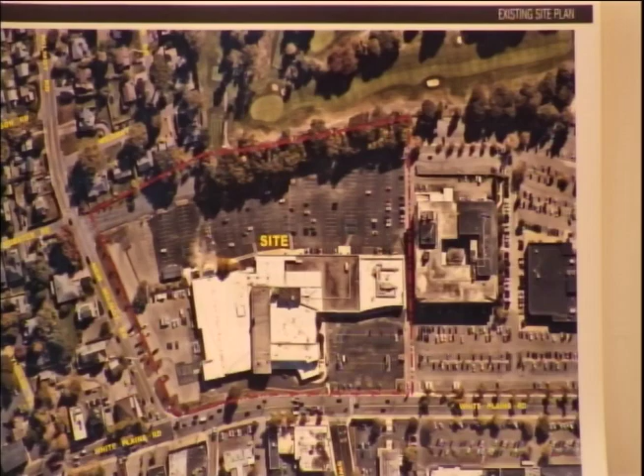So we'll start off. My name is Glenn Leitch, I'm one of the principals at Highland Associates, architect, engineer that's working on the project. This is Michaela Giacomazzi, who is the project manager, who will continue with the presentation.

Thank you for the introductions, Glenn. So as we'll start off, we have the overall site plan and the area that we plan to do our work in. And then we show different angles of the building, how it currently is today, including some of the improvements that White Plains Hospital has been doing.

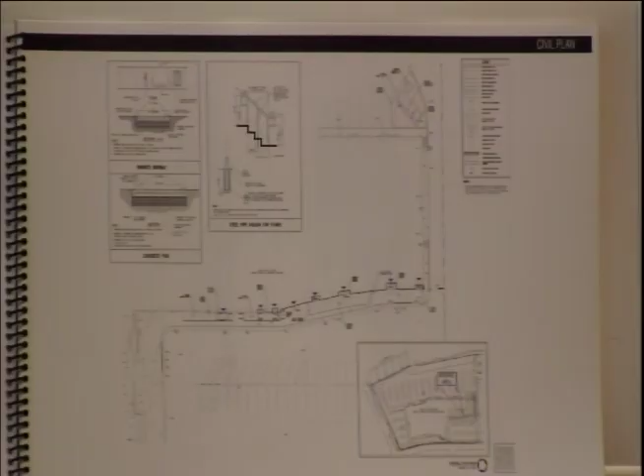And then we go into our civil plans that involve putting in a trash enclosure into the back of the building and some minor site grade curb work. Paul, do you want to speak a little more to that? Good evening, for the record, Paul Dumont with JMC.

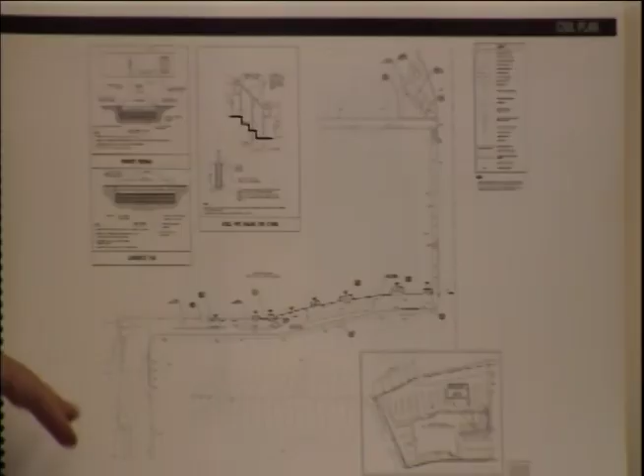Okay, good, so we can see that. So in order to accommodate subdividing the building for the various tenants, the slab on the east side of the building is going to be lowered to its original elevation. It was previously raised to accommodate Lord & Taylor. So on that side of the building, there are some existing steps that will be removed, so that entrance will be flush with the grade. And then on the west side of the plan, where the other tenants' entrances will be, we're proposing just some ramps and landings to accommodate their entrances there. So that really is, in terms of the site work and exterior changes, what we're proposing.

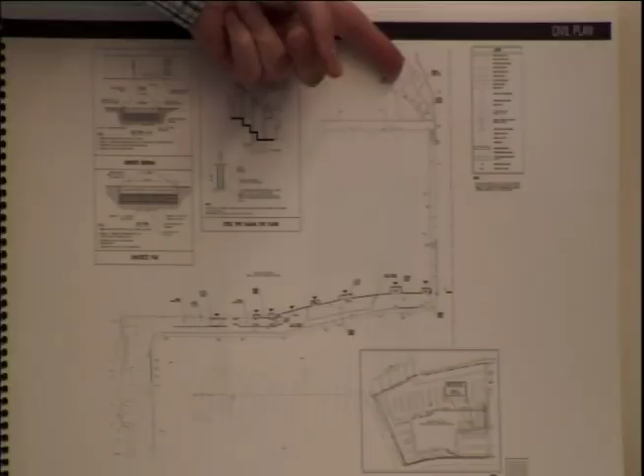And then in the rear of the property behind the building, we're proposing a trash enclosure with a compactor and a dumpster. Thank you, Paul.

So next, our plan just kind of shows the different tenants and how it's being subdivided into the space. We're going to have up to 5. And then also tenant number 5 is taking that first floor space.

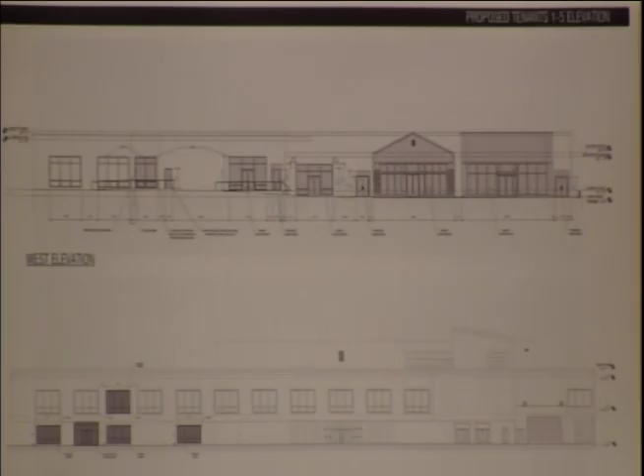Over here, we have our proposed renovations to the exterior facade. We have tenant 1 having some build out, tenant 2 also getting some faux paneling on the front, new openings to kind of match the existing openings that there are now. And then a new exit path for the second floor tenant that will be on this side of the space. The new openings will match the existing windows using the 15 foot modules.

And then on the back side of the building, where tenant 5 is going to be taking in, we are adding some new windows, modifying the entrance at that space, again maintaining the 15 foot modules to go along with the aesthetic for the rest of the building.

I just have one question based on the previous page. On the back, the east elevation, are the dark windows, the gray windows, where they're adding windows? Yes, that is correct.

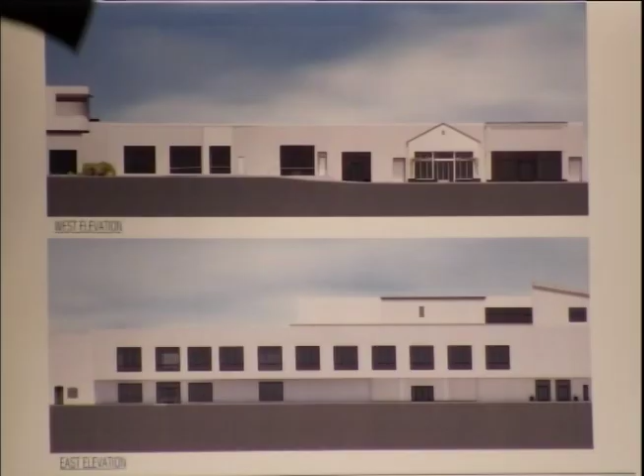We wanted to make sure you guys can notice the difference. These are just our proposed renderings of what some of the facade modifications will be. As noted, we're going to have a new ramp system for some of these areas that are at a higher grade, and we removed the grading from here as that floor slab is going to be leveled to match the old conditions.

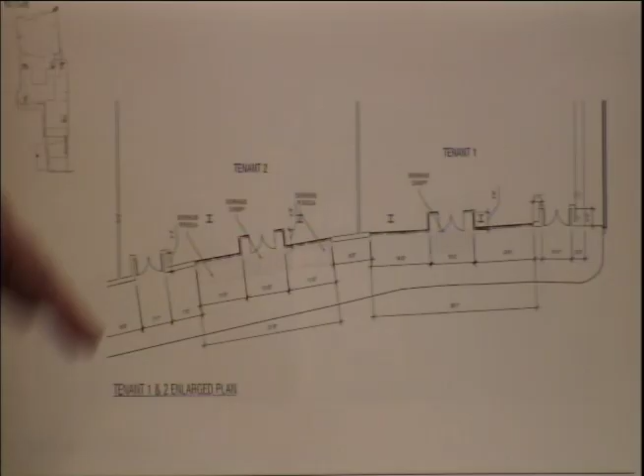And then on this page, these are showing the dimensions of where tenant 1 and tenant 2 are taking their space, the doors they're adding for egress purposes and entrances, along with the pergolas that would be added to the facade systems.

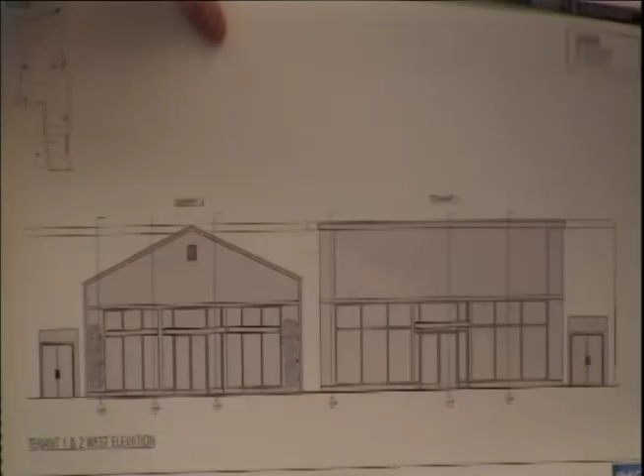And then we go into more detail with tenant 1 and 2, including their facade systems and what they anticipate or plan to do. We show some of the proposed details that show how it's going to integrate with the building facade that currently exists and attaches to said facade.

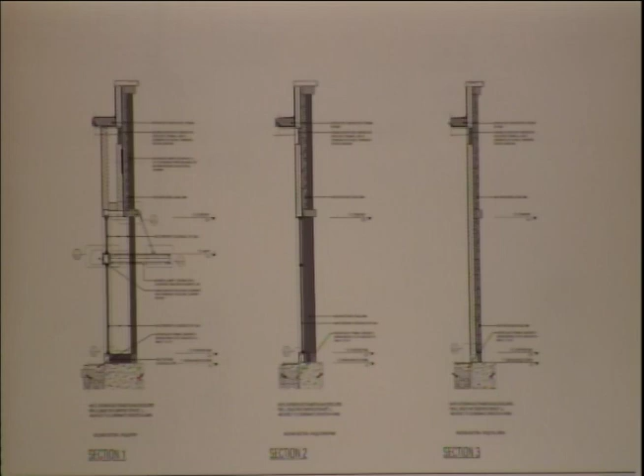Ken, would this be a good time to talk about the materials? Sure, that way, since we're talking about tenant 1 and 2. Hi, my name's Ken, I'm with Interior Architects. I was brought on to coordinate with tenant 1 and 2 and the landlord team on the storefront expressions we're presenting today.

And we have brought a bunch of samples. I don't know if you wanted to see those, if I could bring them up to you. Sure, absolutely. One by one, that's fine. If you could just use the mic too. Thanks.

Okay, so I think if we go to page 17, this is kind of a good overview of the tenant finishes proposed.

Some pretty standard high quality finishes proposed, including this insulated glass unit. This is a Vitro Solarban 72, which meets all energy criteria but allows a lot of visibility into the store. The hope is that you can draw customers into the store. The interior presentation is visible from the exterior, but it does shield the product from damaging sun.

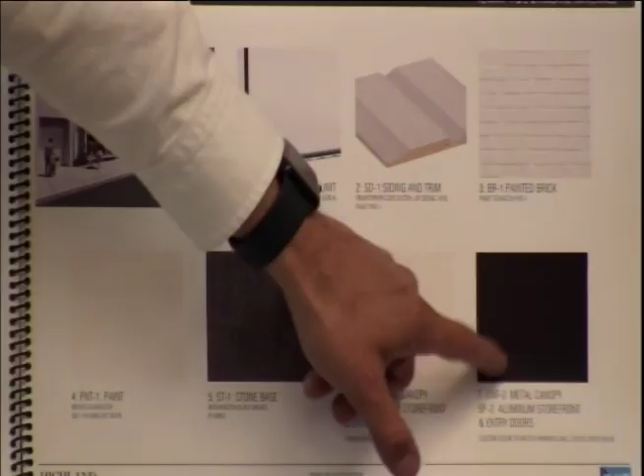contrasting whites when that's all said and done. And then the other color, since we're talking about colors, this is a little bit dark, the green there. It says custom color to match Farrow and Ball Studio Green number 93. We've actually found a Benjamin Moore color, I think it's called Calico Blue, which is pretty much exactly the same — it's their sort of copy of the Farrow and Ball, but more widely available. It's easy to source, similar to the other Benjamin Moore colors the tenant is using on the interior and exterior.

Even though it's blue and it looks green, is that the color? It's called Calico Blue, but it is actually a green color. So that is the color, exactly.

This is a new thing that tenant 1 has been doing, introducing a more unique exterior expression for their brand. It does actually turn out pretty subtle on the storefront system. It looks really nice, it kind of draws your eye. But I'd say it's in the family of classic colors, it's not jarring or anything, which is great.

Where does that go, what does that apply to? So that's actually the rendering. It did turn out a little bit dark, but that's proposed for the tenant 1 space here.

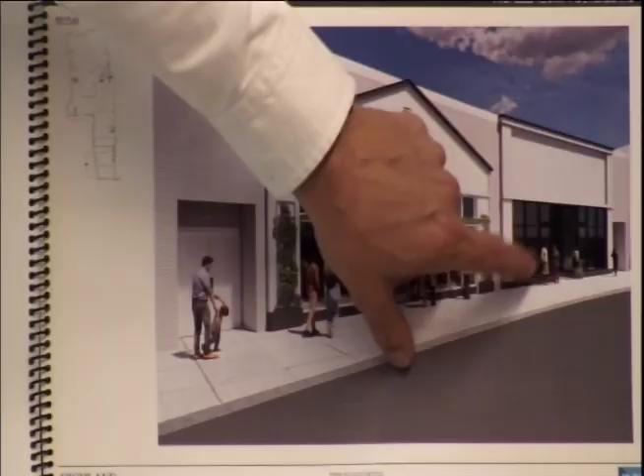The window mullions? The mullions, same deal as tenant 2. The mullions, the canopy, brake metal, everything is meant to match that.

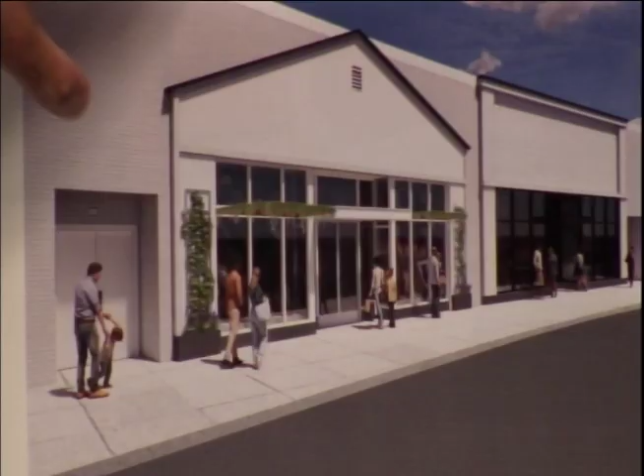And then the brick, that's just representative of the brick intervention proposed for tenant 1. There's a lot of brick existing at the site, so it's meant to complement that and be pretty harmonious with what's there today, just sort of defining tenant 1's facade a bit more with the pilasters and detail bands in brick.

And then stone base - this stone base is consistent from tenant 1 to 2. That's the Washington black basalt, very elemental. It'll patina really beautifully over time. There's other tenants south of here that have used some of these materials as well, the flame and the cove siding. Is there anything I missed up there?

Oh, there's a bronze chip. Pergola there, or canopy, whatever you call that. Is that the wood? I think it's this, isn't it? Yes, so the reclaimed wood is, I believe, proposed for the underside of the canopy.

Oh no, is it this? Sorry. Looks like maybe where the plants are hanging off the canopy. Yeah, it does look like that.

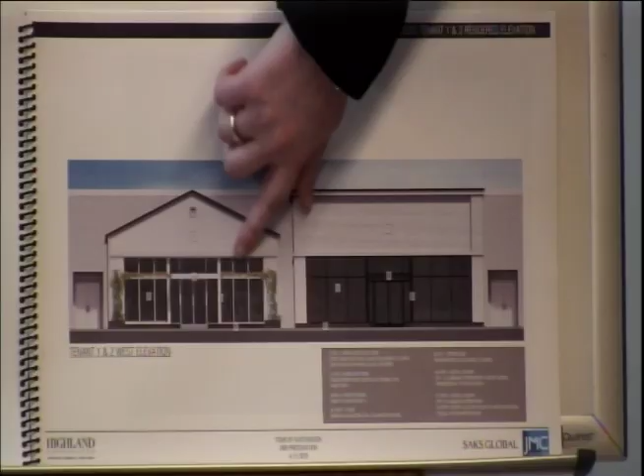So some of the interior fixtures, I believe, are this reclaimed wood. It's not an appropriate actual material for an exterior application because it is reclaimed. So what we've done with other contractors in the past is we sourced some stable wood meant for exterior, and worked through a couple of stain options to match that as close as possible.

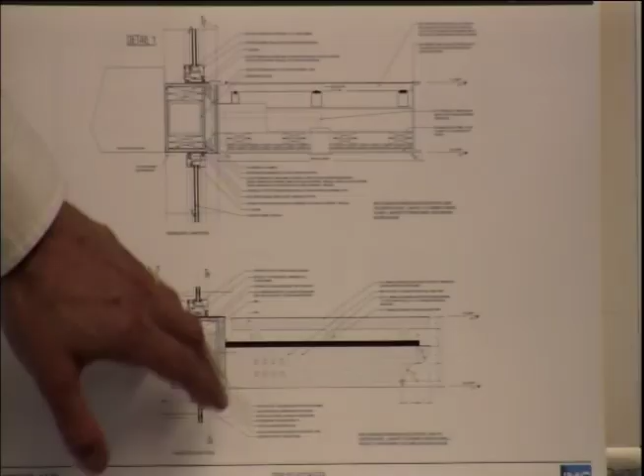But that's what it's going to be, a wood-like thing up there. It would be actual wood. Yeah, the tenant only uses actual, no faux materials on the exterior, so it would be actual wood, stained, with a spec appropriate for an exterior application, especially one here with harsher seasons than other places in the country.

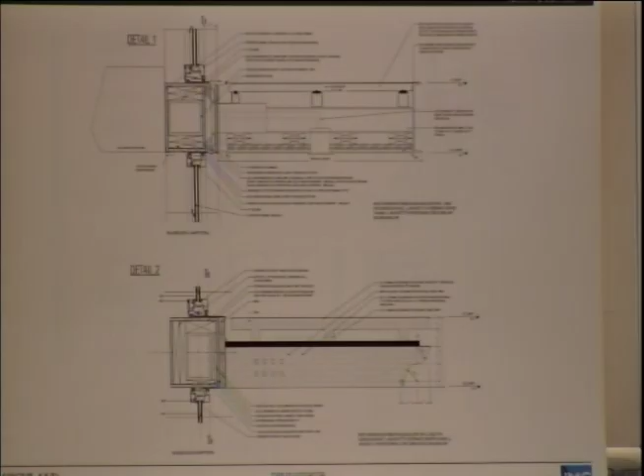So these two spaces, 1 and 2, do have tenants then? Yeah, I was confused by that too, because the packet said they were not occupied, but sounds like they are. Well, 1 and 2 look a little bit more elaborate compared to the others, so I'm thinking. Correct - so in actuality, all these spaces have specific tenancy.

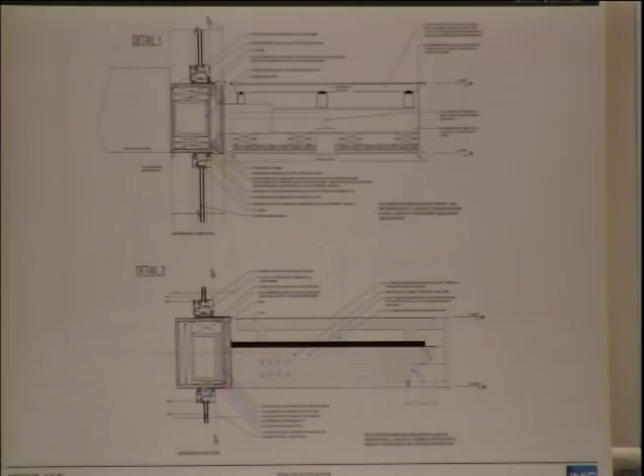1 and 2, for purposes of architecture and by nature of their tenancy, have a difference so the facade looks different. The other tenants are adding some windows specifically for use on the east side, and on the west side changing some egress, and those egress doors are because of the occupancy of the tenancy. In this case, the architecture is different than everything else in the building, so that's why it just happens to look different - this particular tenancy is different than the rest. The other ones are going with the package deal, and these are not.

The last sample I was just about to mention is there's a bronze metal chip to the very right of the brick. Oh, got it. Yeah, so there's a small application of this, but that's the standing seam metal roof on the peaked roof element for tenant 2.

So on tenant 2, there's a wood pergola on each side and then a canopy. Is the canopy closed, for rain protection in the middle? That is the intent. I just want to make sure. Oh.

Yes, so that would be a solid canopy. I think there are canopies similar to this, not in the same development, but south of here. There would be integrated lighting, and it would be solid, kind of shielding customers from any rain as they enter the store. There's a similar element at the tenant 1 space, just a different color. There's no pergola canopy proposed there, but the central element is shielding you from the weather.

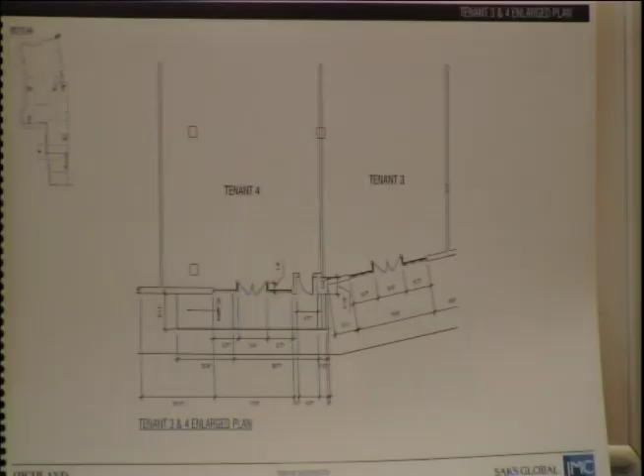So as we move along, we have tenant 3 and 4. Again, this is just a typical plan showing the mullion system, the door openings, any additional exits for egress purposes, and the proposed ramp for tenant 4 to get into that space.

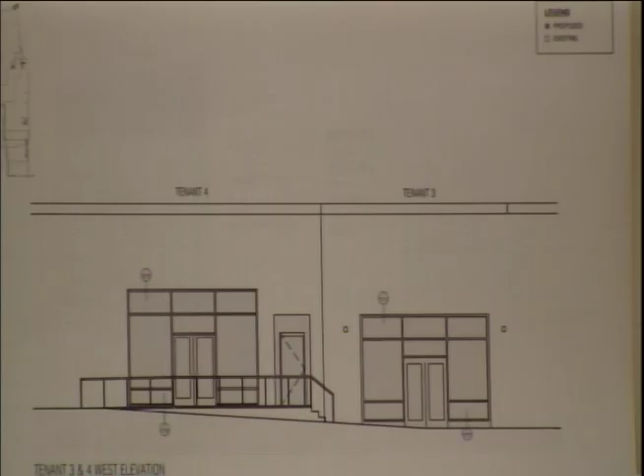And then we have our proposed elevations. Tenant 3 and 4 have a very similar look and feel to almost mimic the existing conditions on site today, and all those materials will be consistent with what is existing. We have our details showing what has been done throughout the building to install these windows.

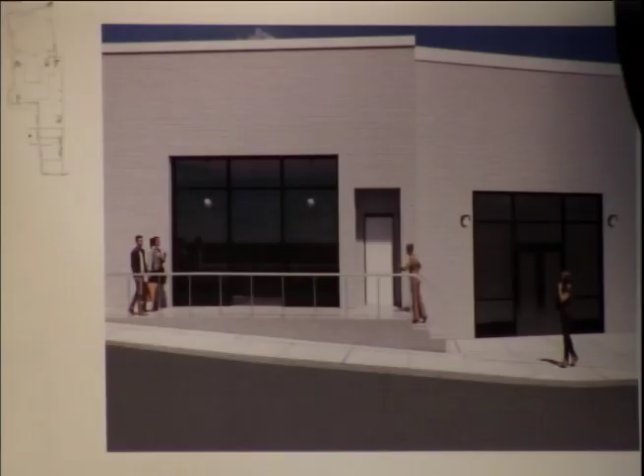And then our proposed renderings for these views, they'll have the black mullions to match the painted brick. For tenant 3, we have these little sconces that'll be installed just to add a little pop of light for them.

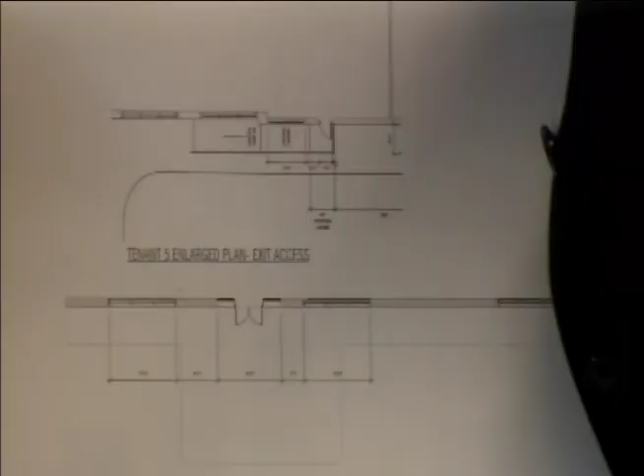And then we break into tenant 5, which takes up the last space on the front side of the second floor. We're going to be reusing the existing ramp that's there, but extending it partially, just so they have their entrance, or their exit, excuse me.

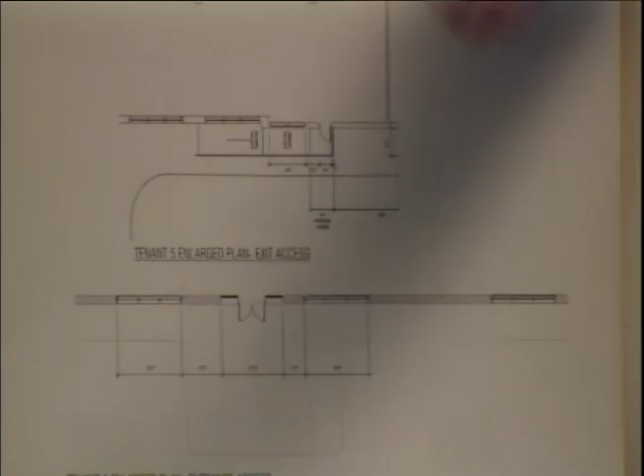And then on the back side, where their main entrance will be, we're proposing new windows at the 15-foot module to match what is currently existing on that back side. Same with the opening for their entrance, we'll have that 15-foot module.

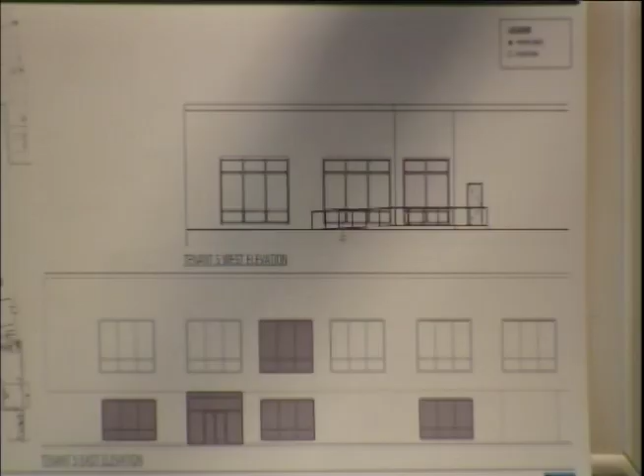And then we have both the proposed elevations for these. As you can see, we have our proposed windows and our ramp extending. On the backside, we are adding in 4 additional windows, and they're going to align with the currently existing windows that have been built in.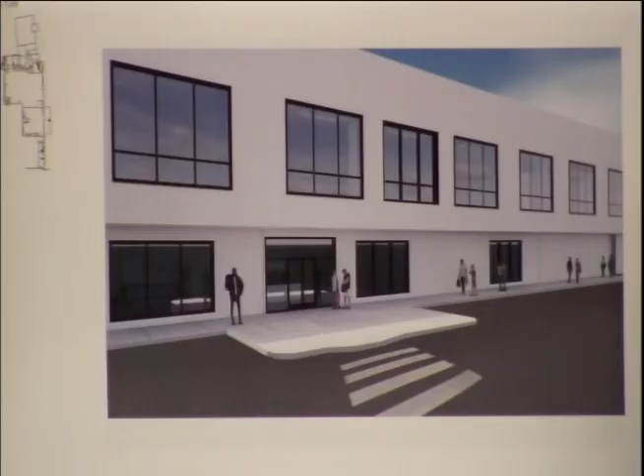So then we have our proposed back view to show the entrance, the 2 new windows, and then 1, 2, 3, and 4 new windows. While you're there, I assume the color palette matches the existing? Yes, it's going to be the black mullions and the same type of glass.

And then this is the proposed front side where the exit would be. We have the 10-foot module, again using the black mullion system, leaving the existing brick material that's currently there in that area.

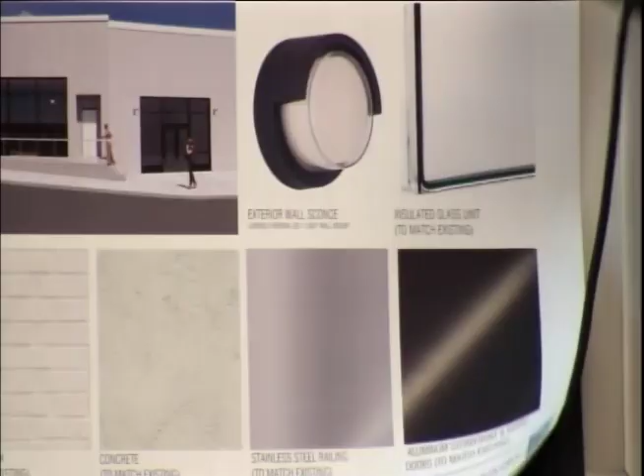And then we just have the tenants 3 through 5 materials, which are all just calling out the existing materials that we have: the glass, the black aluminum storefronts, the stainless steel for the railings, the concrete that is being installed for both the exterior and interior use, and the painted white brick, along with, for tenant 3, the sconce that they're proposing.

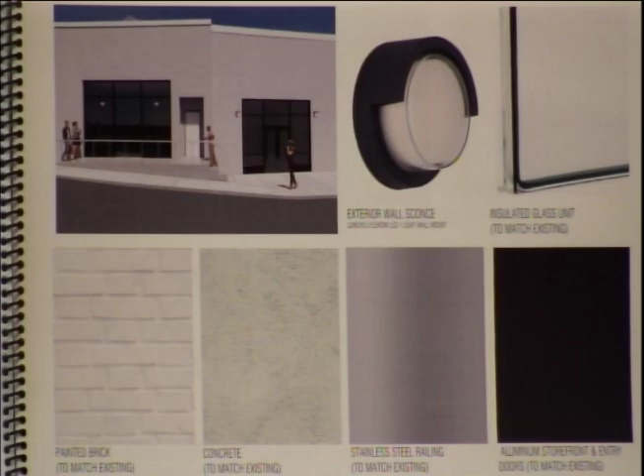And then the last page is just us noting what the overall existing materials are for the space and showing that they match those materials that are being proposed.

Is the chain link fence part of the refuse area? That's going to be part of the trash enclosure, hidden in the back of the space.

And all the other windows that are on the back now, are they all relatively new as well? Yes, that is correct. They got those approved back in 2021 and installed after. There may have been some existing windows, but I think they were replaced. And we're matching those windows both in size.

So the overall intent is to maintain everything that's been going on, really with the exception of those first two stories. Understood.

With tenant 5, so that's a two-story tenant. Correct.

Is there an intention for one of the entrances to be the main entrance, like the downstairs one? Yeah, looks like the bigger one on the first floor at the back of the space is gonna be their main entrance. One of the keys to utilizing that space was to keep the entrance only on the east side.

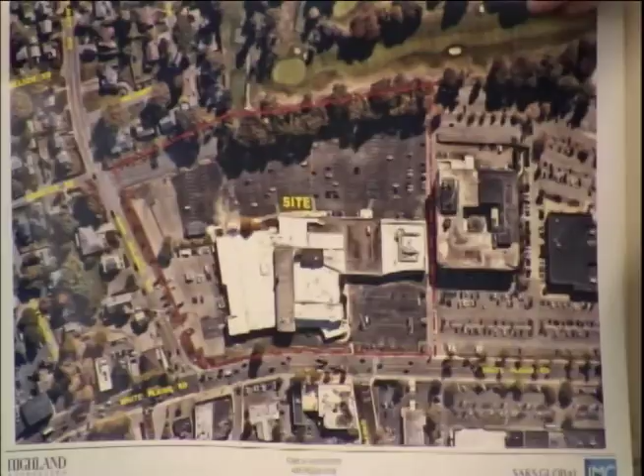So is it visible on this rendering, or no? No, it's to the right of that, and it's not changing, we're not making any application. I'm just trying to visualize where it is, that's all. It's pretty innocuous. It looks like it's part of the loading area, just right next to the loading doors. Okay, gotcha.

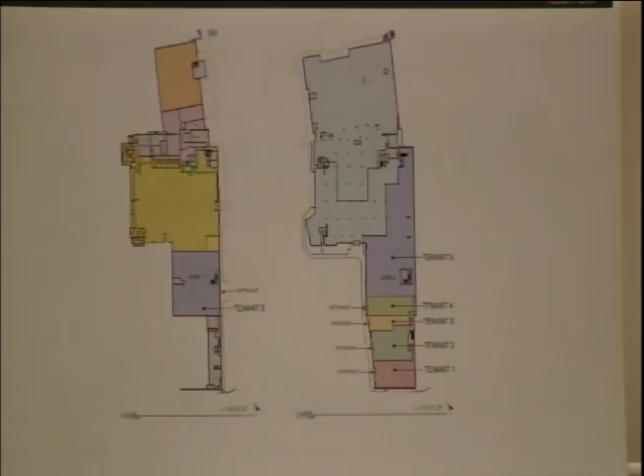Alrighty. So then I think we can open this to a public hearing.